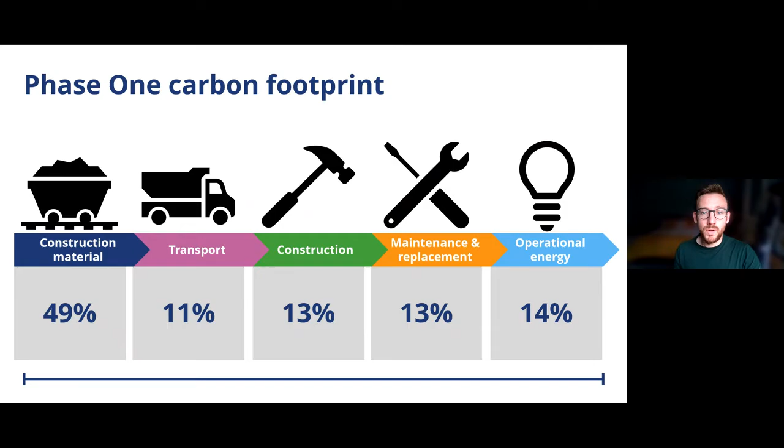About half of the carbon footprint is associated with the extraction, processing and manufacture of raw materials and construction products. About 25% is associated with the transport of those materials and products to site and the subsequent construction and installation processes. So about 75% of the carbon footprint is associated with the construction phase, and the remainder is associated with the next 120 years: maintenance, replacement, and all the energy consumed to operate our trains, stations, depots and infrastructure.

We've also instructed and mandated this to our main work contractors, so they're required to implement the same carbon management best practice. That means HS2 and our supply chain are working within a common carbon management framework, with compatible and complementary processes in place that support effective and efficient delivery of our carbon reduction objectives.

But we're well aware that reducing carbon is as much about changing behaviours as it is about changing processes. So we know we need to raise awareness, build capability and motivate action to deliver lower carbon solutions. As part of building capability, we've developed a programme of carbon literacy training, which seeks to provide colleagues with the motivation and capability to take action to reduce carbon emissions. We've rolled that learning out amongst our board and executive leadership team, and we've achieved Carbon Literate Organisation Bronze accreditation.

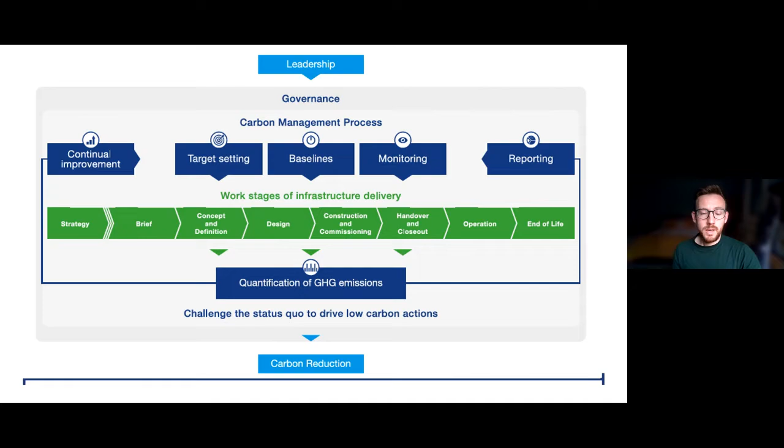In terms of tangible carbon reduction examples, we have Align joint venture, who are delivering Colne Valley Viaduct. They're on track to cut the amount of embedded carbon by 28% within that structure, equating to over 63,000 tonnes of carbon dioxide emissions. They've done this by working closely with our rail systems experts, narrowing the structure by over a metre, which has enabled a significant reduction in the amount of concrete and steel needed and the associated carbon emissions. They've also significantly reduced the amount of earthworks required for the approach embankment, reducing carbon emissions from the transport of materials to site and helping to reduce disruption for local residents by cutting the number of HGVs on local roads.

Thame Valley Viaduct is another great example, delivered by EKFB, and it's a really good example of how contractors are using the latest engineering techniques to reduce carbon emissions from construction. Here the design team have simplified the structure of the viaduct so that every major component can be made off-site before being assembled on-site, effectively slotted together like a giant Lego set. That's cutting the carbon footprint by an estimated 33%. As well as cutting embedded carbon in terms of materials, the approach requires fewer lorries to deliver material to site, cuts waste, and will reduce disruption for the community during construction.

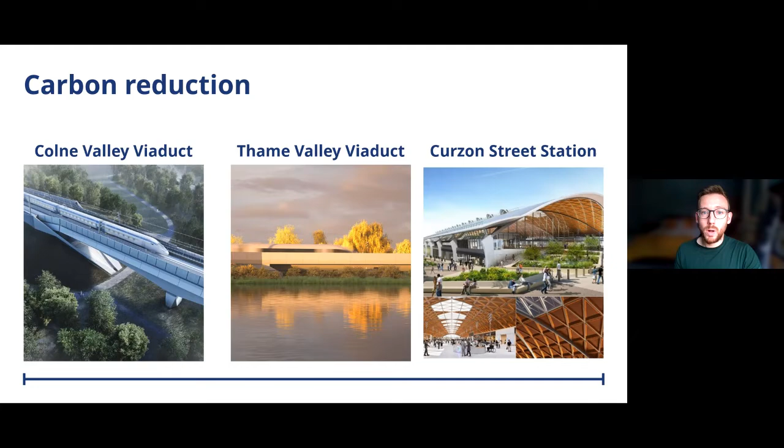The paving in the public realm has been reduced in depth by 38%, so that reduces embodied carbon. And we're also using 100% recycled content steel roof sections. They'll be bolted together rather than welded as well to aid future reuse and maintenance.

So our work to cut carbon emissions is well underway. We have the right processes, systems and tools in place. They've been independently verified as being in accordance with the best practice.

We're a carbon literate organisation. We provide our colleagues with the knowledge, motivation and ability to take carbon reduction action. And since 2016, we've been working to halve the carbon footprint of phase 1. So we're already delivering substantial carbon reduction. We're making good progress against that target with a 25% reduction forecast at the end of March 2022.

But we want and we need to go further, and that's why at the start of this year we launched our net zero carbon plan. The plan explains the work that we've undertaken to date, what we're doing now, but importantly, it maps the progress that we'll make in the years ahead on our journey to achieving net zero carbon emissions in 2035.

So the plan includes a few headline targets, namely to become a net zero carbon business by 2025, to deliver zero carbon travel from day one of operation, and to achieve net zero carbon construction and operation from 2035. And what we mean by that is that we'll reduce emissions as far as possible, and from 2035 we'll offset the residual carbon emissions that we can't eliminate as we build, maintain and operate HS2.

So we plan to work towards net zero by, for example, eliminating diesel on all our construction sites by 2029, specifying and purchasing concrete and steel with half the production carbon emissions of 2021 levels by 2030, and using 100% zero carbon energy to power our trains, stations, depots and infrastructure.

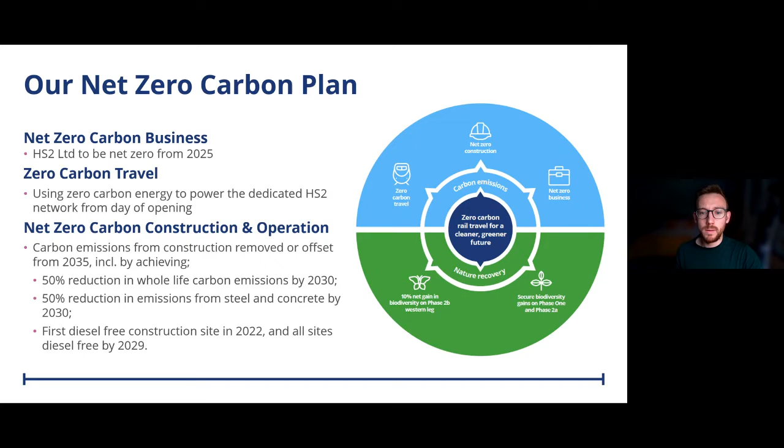So to support those targets, we've identified 10 key action areas that will be critical in delivering our ambition. The action areas are really diverse in nature, but for example, they include building a consistent net zero carbon culture, raising awareness, motivating action and building capability to drive carbon reduction performance, communicating our net zero carbon objectives to stakeholders and being clear about how we'll work together.

There's opportunities to use digital engineering tools and processes to transform and improve project delivery to reduce carbon emissions. We'll need to invest in innovation and form partnerships to speed up ways to cut emissions in our supply chain.

We'll need to work with industry groups and peers, supply chain partners, key stakeholders to make sure that our efforts are aligned, that they're effective and that they inspire action. And we're also committed to sharing best practice and lessons learned with the wider construction sector. We'll need to use our influence to encourage others to take action to tackle climate change.

So there is a lot to do to get to net zero, but our work to cut carbon emissions is well underway. And to show you what that looks like down on our sites, I'm going to pass you over to Andrea.

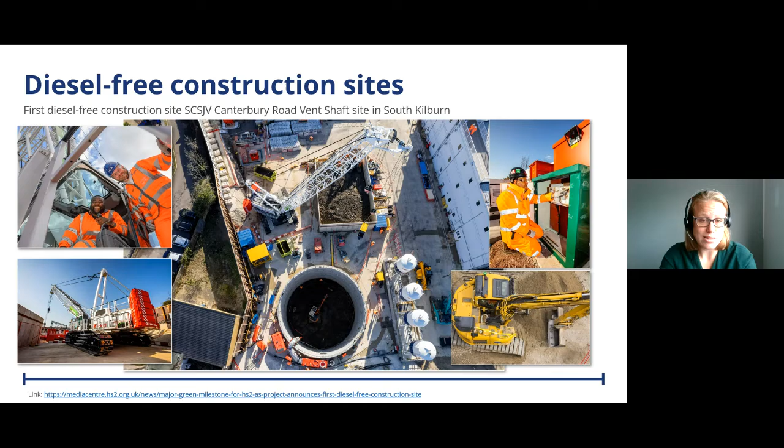I already mentioned our fully electric crawler crane, but we've in fact got three - one at Canterbury Road ventilation shaft, and two at our Old Oak Common station. They're fully electric crawler cranes - two 160 tonners and one 250 tonner, so really, really big machines, again powered by batteries, charged on a mains power connection, and then able to run off that umbilical cord system.

You may have seen in the media, our contractor up north, BBV (Balfour Beatty VINCI), recently deployed a fully electric piling rig to compare it against the diesel alternative. And the results have actually been really fantastic.

The operators are saying it's a lot more responsive, and there's less pressure on the operative working in the cab with the movement around it, which is really positive to see. We're hoping there will be more machines like this at this scale that we can trial across the project.

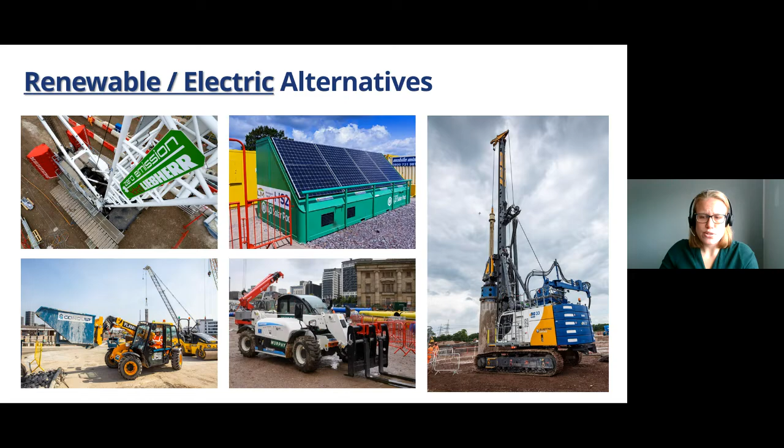Some of the other solutions - hydrogen has obviously been a big buzzword for a while now. It's great that we've got a range of different solutions, from fuel cell tower lights to welfare units. We've also been trialing two very big hydrogen fuel cell generators, both 250 kilowatts, as direct replacements for diesel generators at our Victoria Road crossover box in Ealing.

The key there is the learnings from these trials will be shared with all of our joint ventures as well as the wider industry, to identify where we can adopt these - what were the challenges, what were the barriers, and how do we get over those to push these technologies as construction norms.

Not only are there absolutely zero emissions, they're far quieter, and the only byproduct is deionized water. I was recently on site and did try some - tastes exactly like any other water. It's a really fantastic technology that we're starting to see increase uptake across the construction industry.

And then it's a case of, well, what do we do? What else can we do? What if there is no mains power electricity? What if hydrogen isn't as accessible as we need it to be?

The two photographs on the far left-hand side were from an Innovate UK funded project with a company called Oaktech, where they developed the clean air gas engine. Essentially, the engine runs off biogas rather than diesel. It's been twofold.

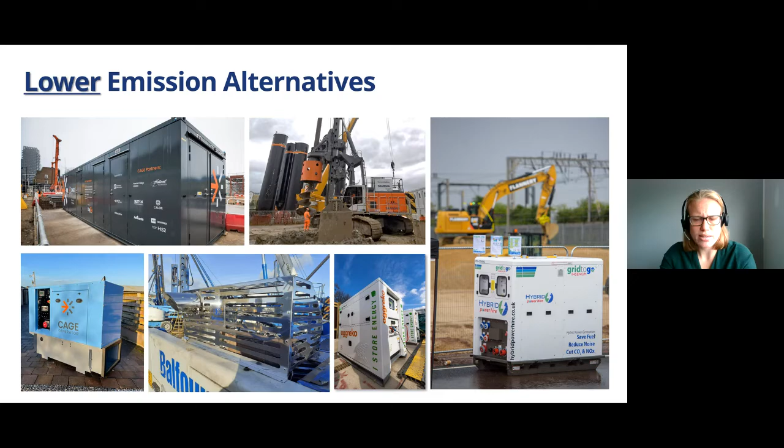We've also been working with Eminox on retrofit solutions to bring older diesel engines in line with the latest, cleanest emission standards. I mentioned the use of biofuels previously, and using battery storage solutions to reduce our diesel consumption, which leads nicely into what other efficiency solutions are there - really important within construction where we don't have diesel-free alternatives yet.

What can we do now? Those come in all shapes and forms, from changing methodologies on site to be more efficient, to using different solutions such as retrofit, as I mentioned, or hybrid solutions.

We've also been trialing flywheel technology, which stores up energy so you can have a much smaller generator. You also don't need your generator running for 8 hours a day - it can now be 5 hours a day. So you're really just reducing your fuel consumption and reducing your impact on surrounding communities.

There is a lot of information on these different trials on our HS2 web page. If you look for the HS2 and air quality web page, you'll see more information on some of these case studies. As more information on these trials becomes available, we put it out into the public space and share it across the industry, so we can all be aligned and making use of that information.

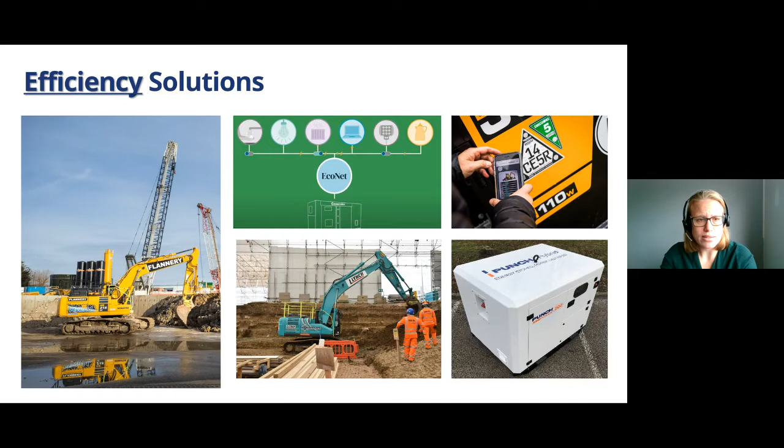Just to conclude then, as Mark said, it's not simply a case of 'we think it's right, we'll do the trial and we'll stop there.' It's how do we make this the new construction norm? How do we roll this out at scale and use the scope and stretch of the HS2 route to do that?

And we're working really closely with the Department for Transport as well as other arm's-length bodies to really align plans in the diesel-free space, to make sure that we move forward on this journey as an industry and not in our individual silos. So we're working closely with Construct Zero to develop an industry-wide diesel elimination roadmap, which, with implementation of innovations like those I've highlighted already, will aim to mitigate the risk linked to escalating fuel prices, as well as accelerate the reduction in emissions and meet some of the objectives we've set out.

There's a lot of work being done in the background, and where we can, we're trying to take immediate action. So we've been working on an anti-idling toolkit, which will be released very soon to the wider industry. What that looks at is, what can we do with what we've got right now? Simply around education and changing behaviors, we can have a really big impact. We're collaborating with the Supply Chain Sustainability School, our suppliers, our contractors, and academia to make sure we can have a useful pack that the industry can use. So it really is a watch-this-space situation - there's lots more coming as we make progress on our diesel-free journey and ambitions.

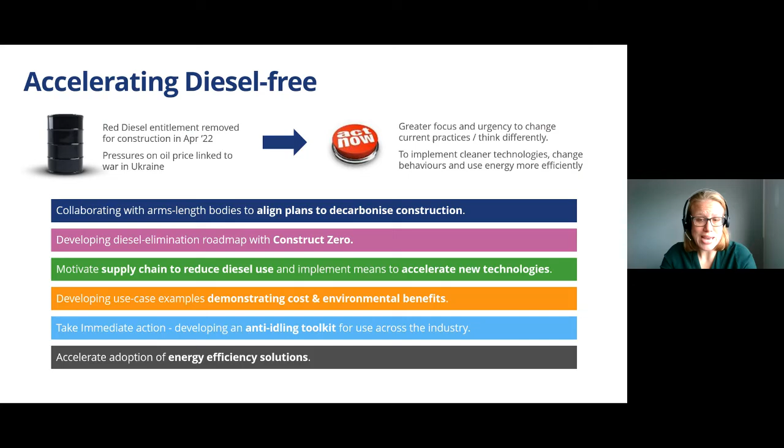What I'm going to do now is hand back to Hannah to detail some of the work we're doing around creating a green corridor, and hopefully we can touch back on a few of those innovations through the Q&A.

Thank you, Andrea. So, as mentioned by my fantastic colleagues Mark and Andrea, we're doing all we can across the project, using the latest, greenest technology to really look at where we can reduce carbon emissions where possible, but also helping to support the breakthroughs we need to make construction cleaner.

But as a project, we also take our responsibility to the natural environment very seriously, and we're committed to a no net loss of biodiversity. Building the infrastructure needed for a project the size and scale of HS2 means that, unfortunately, it is impossible to avoid some damage to the landscape and the countryside. But we are striving as a project to leave an overall positive legacy for nature, wildlife and people, and we really are committed to that.

And to do this, we're creating a green corridor, and this is going to run alongside the railway and help integrate HS2 into the landscape. But it's also going to create a network of bigger, better connected, climate resilient habitats that everybody is going to be able to enjoy. We're planting millions of trees and shrubs along the route, and as these trees grow, they're also going to play an important role in helping fight against climate change, through helping to absorb and remove carbon from the atmosphere. So I'm going to touch in more detail on the green corridor in the next few slides.

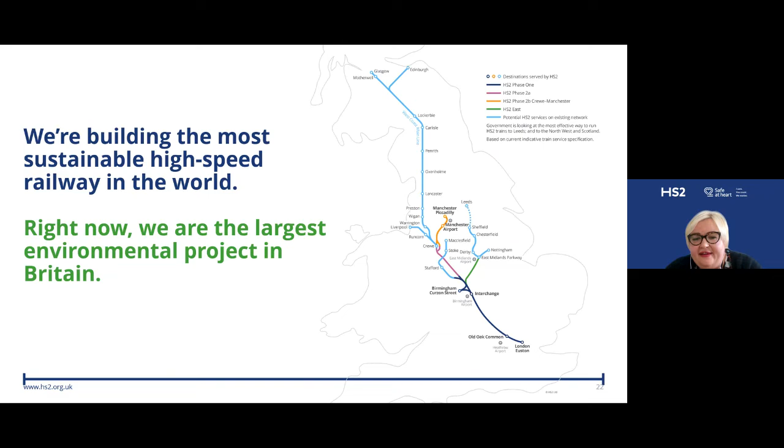And it's going to replace any habitats that are affected by the construction of HS2. All of this is being done while the rest of the HS2 network is still being developed and designed, so this means it's just going to provide more opportunities to expand the green network and the green corridor further north. It's also going to help people and communities living along the railway to really reconnect with the natural world. So looking at HS2, it really is such an incredible major opportunity to accelerate environmental benefits in local areas.

So I'm going to move on now and talk about some of the green corridor principles.

We take the environmental cost of construction very seriously, which is why we're delivering an unprecedented programme of tree planting and habitat creation alongside the railway. Our vision for the green corridor includes planting 7 million trees and shrubs, including 40 native species specific to each location.

We're also creating and enhancing 33 square kilometres of new and existing wildlife habitat. To put that into everyday context, this equates to the size of 4,600 football pitches. It really is just absolutely huge, the scale that we're creating, and it's going to increase around 30% more of what currently exists.

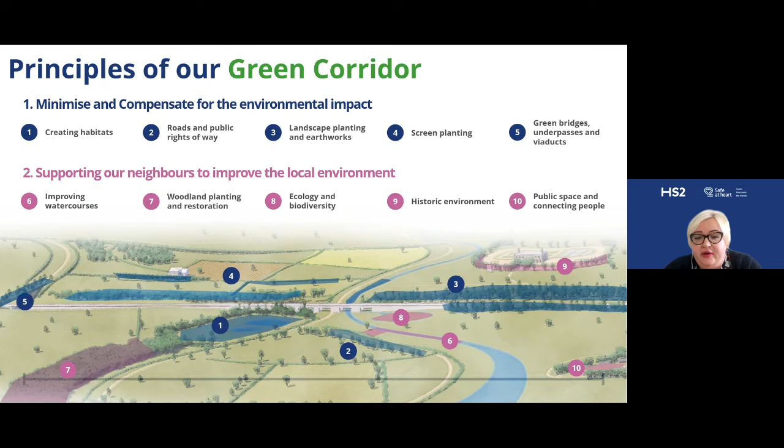Our programme of habitat creation includes species diverse grasslands, ponds, and native trees and shrub planting, all helping support a broad number of species such as newts, reptiles, badgers, birds and bats. Far from being a barrier to wildlife, HS2 is actually going to be crisscrossed by access routes with 140 bridges and underpasses on phase 1 alone, including 16 specially designed green bridges covered in planting. It really is incredible what the green corridor is going to do.

Another goal of the green corridor is to minimise and compensate for the environmental impact of HS2. Where we can't avoid an impact, we are creating bigger, better connected habitats. So how are we doing this exactly?

If we look at rural areas like this one shown in the image, we're trying to avoid affecting the surrounding environment as much as possible, particularly through the railway's alignment, making sure it blends into the landscape. An example of this is over 32 miles, or 51 kilometres, of the railway between London and the West Midlands is going to be in tunnels, and around 44 miles, or 73 kilometres, are going to be in cuttings. This means we're actually going to lower the railway within the landscape, reducing its visual impact.

Where we can't avoid having some effects, we're working with local communities to really look at ways we can help minimise it. This is being done through things such as changing the design of the structures we're building to better integrate and suit the landscape it's going into.

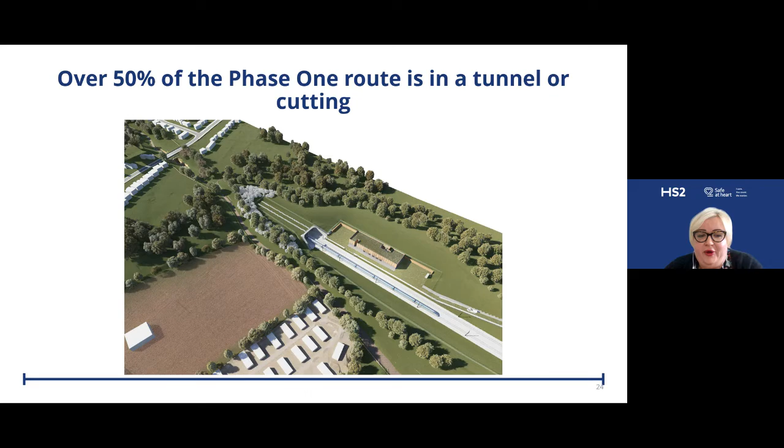We're doing work in urban areas as well, building new stations to serve the new railway in some of our major cities. These stations are not just seen as construction projects, but as real opportunities to create transformational green infrastructure, and it's going to help play a part in regenerating these towns and cities.

The stations and their surroundings are also going to include green buildings and a lot of new green spaces. We're working to really enhance the nearby wildlife areas in and around the stations, including canals, streams and rivers. Through initiatives, we're looking to improve air and water quality and even help cool the urban environment, which is also feeding into that requirement around adapting to and mitigating climate change.

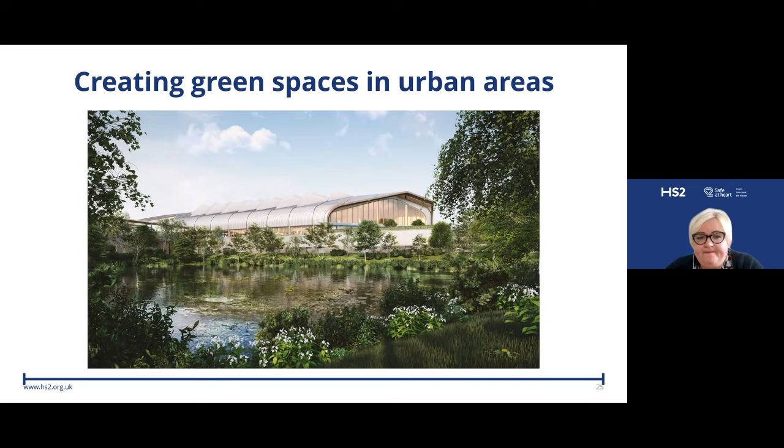We're also working with our supply chain partners to really protect and enhance the local environment. One of our single biggest landscape and habitat creation projects is actually in the Colne Valley on the edge of the Chiltern Hills, where we're creating 127 hectares of new chalk grassland, woodland, wood pasture and wetland habitats.

To put that into everyday terms, that's the equivalent of 178 football pitches. The size and scale is just incredible, and it's also going to deliver a significant ecological gain for that area.

To do this, we're going to be recycling 3 million cubic metres of chalk taken from the tunnel excavation. This is also going to help cut our carbon emissions by working to reduce our road haulage and the waste treatment it would otherwise require.

Almost 65,000 trees and shrubs and nearly 2 miles of new hedgerows are also going to be planted. People are going to be able to enjoy this new connected green space with 2.7 miles of new footpaths, cycling and horse riding routes. So some really incredible benefits from just this one habitat alone that is being created as part of the project.

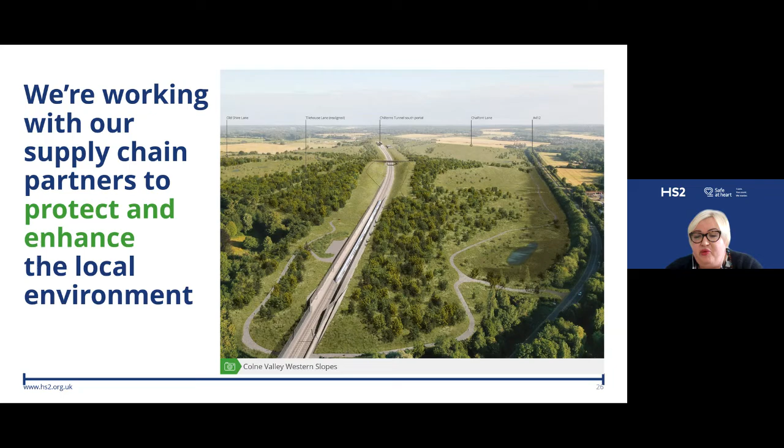As our work to build the railway progresses, so does our work to create new landscapes, habitats and woodlands, which you can see on the screen there. So far, we've planted over 700,000 trees and created over 60 new wildlife habitats. These habitats have included a massive range, built between Greater London and North Warwickshire, and include species diverse grassland, ponds, native trees and shrub planting. All of these support species such as newts, reptiles, badgers, birds and bats.

One example of this is the South Cubbington Woods in Warwickshire, where we've created 7 new ponds, which are already attracting swallows and swifts, and are also home to newts, frogs and insects. There are also refuges and basking banks for reptiles, bat boxes and fruit trees, which as they grow are going to provide potential bat roosting habitat as well.

We've also got extensive grassland that's been planted, which is going to really support local wildlife, alongside 60,000 new trees, including native species such as oak, hazel, birch, holly and hawthorn. Around 17 hectares of habitat have been created around South Cubbington, including 6 hectares of broadleaf wood, and this also links the habitats of South Cubbington Wood and the River Leam corridor, really demonstrating that habitat connectivity.

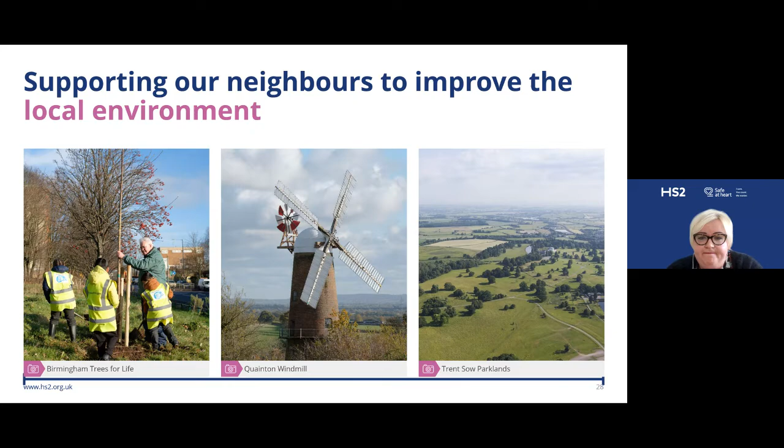To date, across phase 1 and phase 2A, we have funded 207 projects, totaling 12.04 million, all helping local communities to improve their local environment. As it says on screen, we're really creating a resilient green corridor that both nature and people are going to be able to enjoy.

So let's do a bit of a recap. We know inevitably that HS2 is going to leave a footprint on the British countryside. We can't deny that, but we are working to do everything to ensure that it's a positive one. We're going to create a railway that respects the natural environment by conserving, replacing or enhancing wildlife habitats where we can, and we're also looking at avoiding or reducing impact on the countryside in the first place.

We're doing this with over half of phase 1 routes already in a tunnel or a cutting, and we're also creating the green corridor, which is going to run alongside the route. We're going to plant 7 million trees and shrubs and leave behind 30% more wildlife habitats than were there originally. We're helping local communities to improve their local environment and get appreciation for and access to nature, and we're also committed to achieving no net loss of biodiversity along the route.

I think what's really important to note is that, as well as being Europe's largest infrastructure project, HS2 is also Europe's largest ecology project. We are really working as hard as we can to ensure that as a project, we really can leave behind an ecological legacy that we can all be proud of.